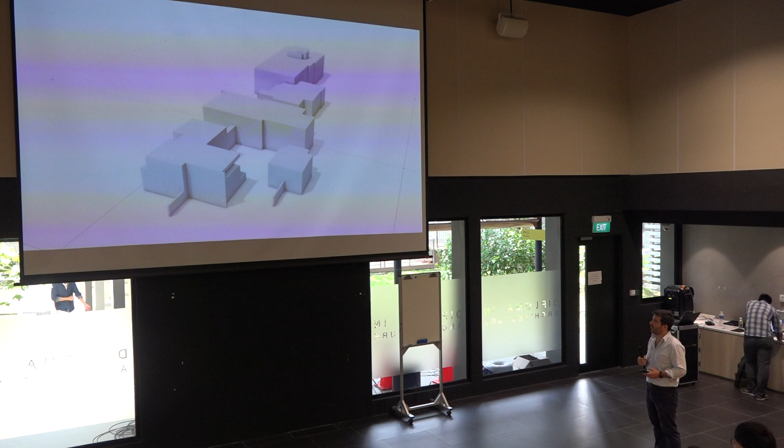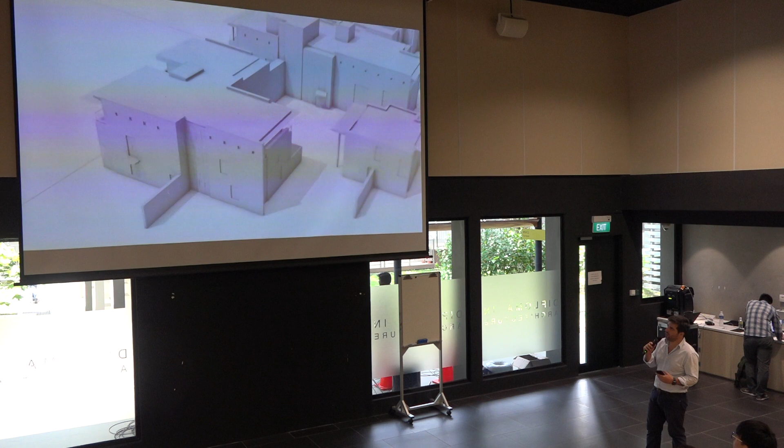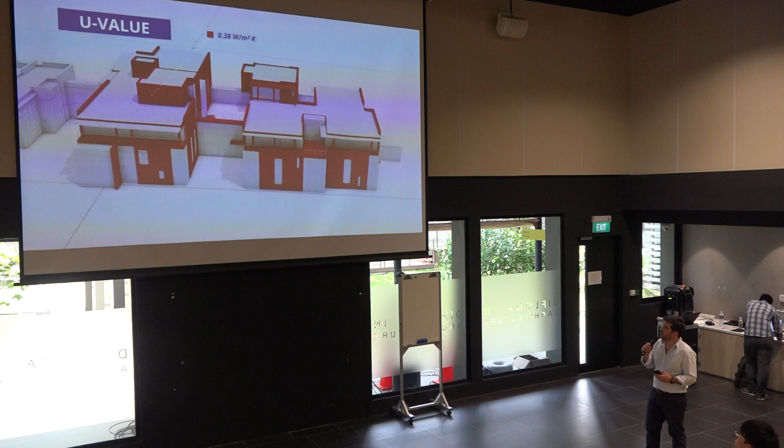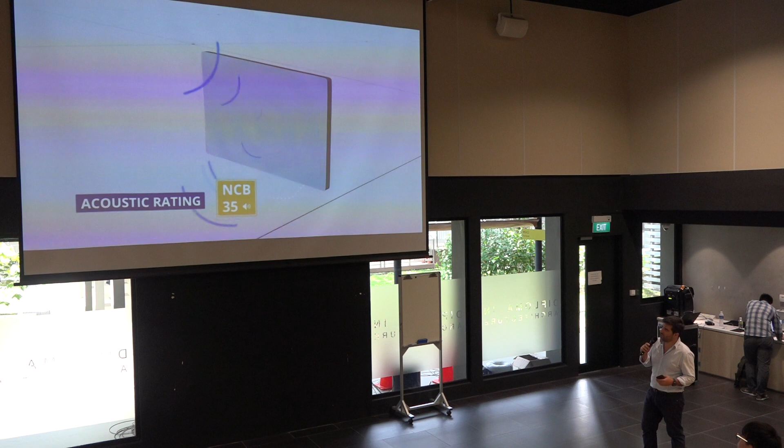We can start with the mass modeling, checking what are the areas that we have on each floor. We can document it with different colors. Then when we start checking the real building elements, we can check what are the properties for the windows, properties for the slabs. And also check, for example, the acoustic rating that elements have.

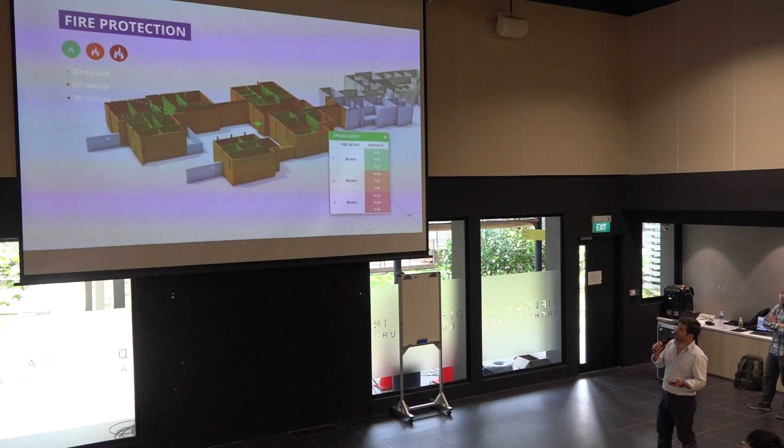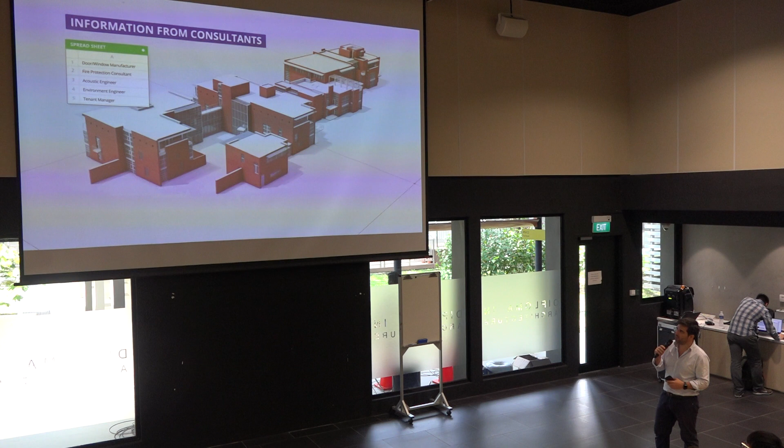We can use the connection. You see that we have a spreadsheet, and we can key in what are the values that we want to push back to the BIM model. I'll also showcase a few of these examples when we go for the training.

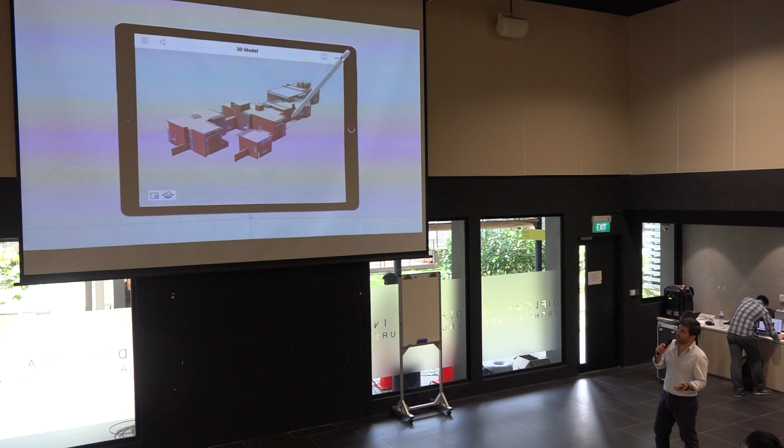And once we finish the project, we can bring it into a tablet or into a mobile device and use that as a presentation tool. Instead of bringing the computer, you can just present it on a mobile device.

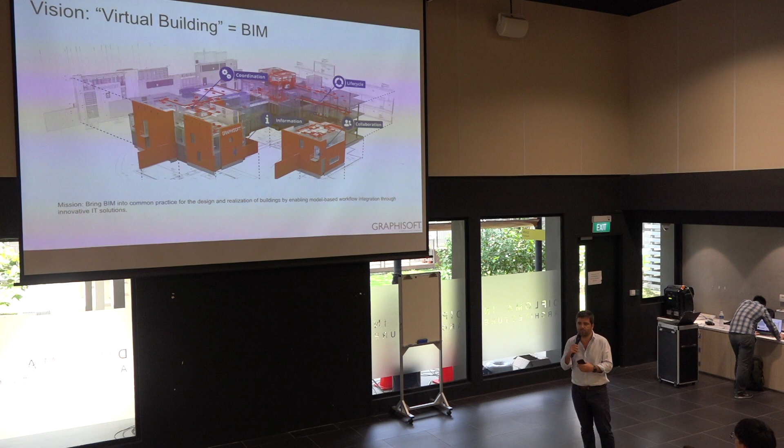So pretty much you see that the building is not just the geometry, what we see in it. There's a lot of information that we have to give to it. It's not just the textures or the color or the shape. We might have a lot of intentions that we want to transmit to the building as a property. So fire rating, acoustic rating, all this kind of information.

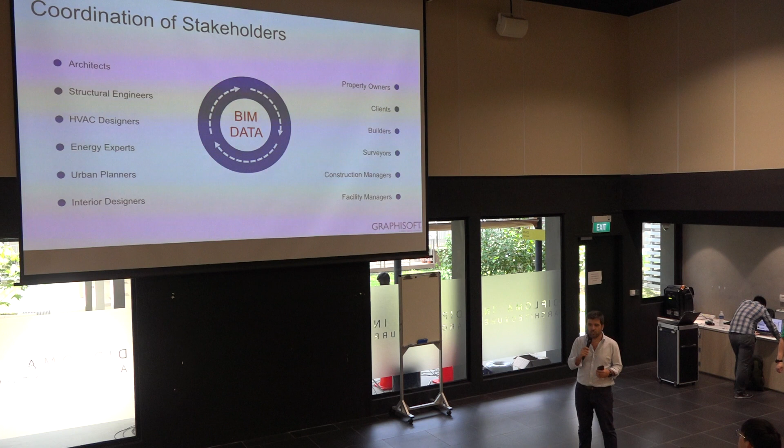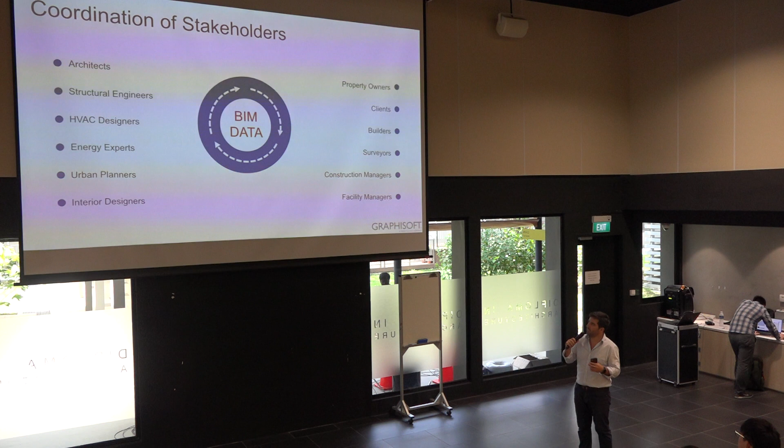So this is part of the IPD process, and what is the idea behind this? In the center of all this process, you will have one building, or your design, that will be the BIM data, and you can make it integrated with all the different stakeholders. And basically, it's not just the technology. The technology in this case is developed by Graphisoft or other software developers, but you also need to have the people willing to try all these things. That's why we have you here.

And the other thing is the process. So you will see that with different tools, people can come up with very different results. Not just in terms of design, you might want to go and showcase a very green building that will have a very sustainable approach to the design, or you might want to go and have a very funky building where the shape that comes out of it is going to be your key factor to win the competition. So it really depends on how you want to focus and what process you're going to take.

In this case, as our solution ecosystem, what Graphisoft has is Archicad as the authoring tool. This is where you can create the building, where you generate the geometry. Then we have the BIM data management tool, which is called the BIMcloud. This basically allows multiple users, so as a team like you guys are, to work together in one single model or in one single project at the same time. It's almost like Google Docs or Google Spreadsheets, where you can have multiple people editing.

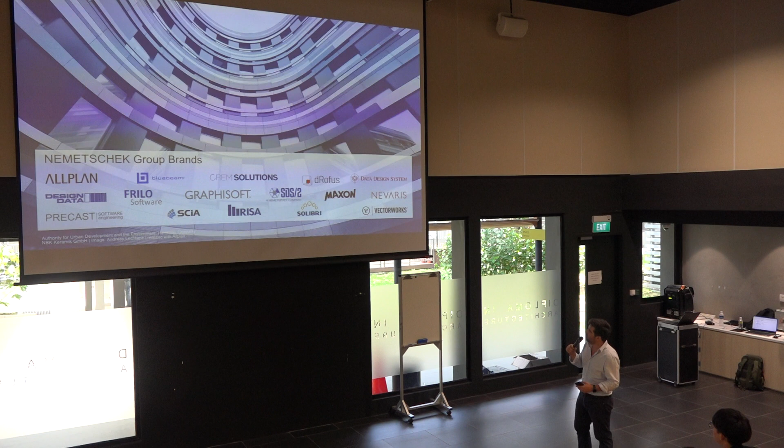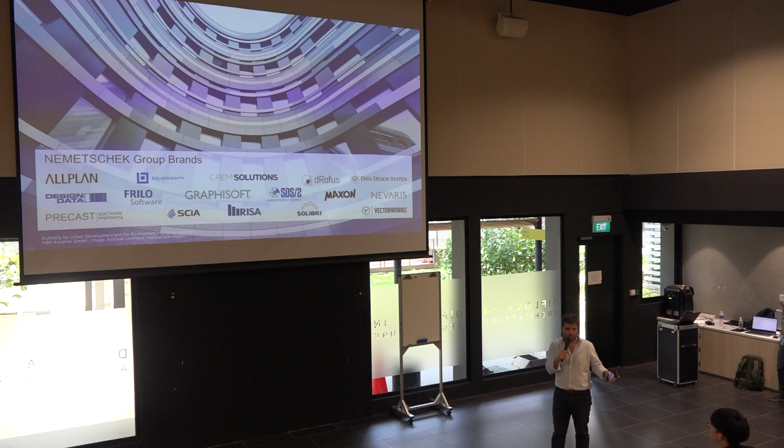So these are some brands from the Nemetschek Group. Obviously, the connection between these softwares and Archicad are more deeply integrated because they belong to the same group. So we always try to have a live connection. We have the Maxon rendering engine built into Archicad, a live Solibri connection, a live dRofus connection. So everything that you do in one software can be seen on both sides.

We're also based in almost every country in the world. We have 85 distributors, 11 subsidiaries. And the important thing for you guys is that in Singapore, we are direct here, so we get closer feedback from the market, and we work closer with the market as well.

So the main focus of using a BIM tool is, instead of you starting with just 2D drawings and then going through the different project stages and somewhere in the middle delivering a BIM model—this is pretty much what everybody was practicing as a BIM workflow in the beginning of their careers.

But the idea should be that you have BIM data as the backbone of your process. So even if you start with a mass model, you can start directly as BIM because you need to ask the model for information like what is the area, what is the volume, what is the orientation that I have from this facade or that facade, is this one exposed to sun or not. So all this information is pretty important even in the early stage of the design.

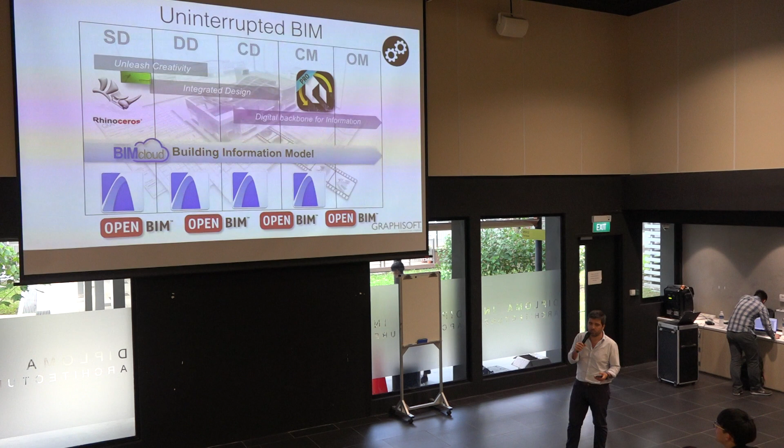So throughout different stages of design, you can see that Archicad is like the platform for this. BIM Cloud is the collaboration platform, so if you're working with more than one person, you should use BIM Cloud for it. And we have different solutions that go throughout the different project stages so you can focus more, and OpenBIM is always there to back you up if you want to do some work on site.

In terms of content, we have been working very extensively in Singapore to develop a lot of dedicated content to this region. Mostly you guys can connect to our Asia BIM blog, a blog that we created here where we answer some of the queries.

For example, you have the points for the terrain where you're going to do the design, and you want to bring it into Archicad. You only have the X, Y, Z coordinates. We have an article to show you how you can do that. So we try to focus and have approaches on what our clients, students, or people in the region are looking into.

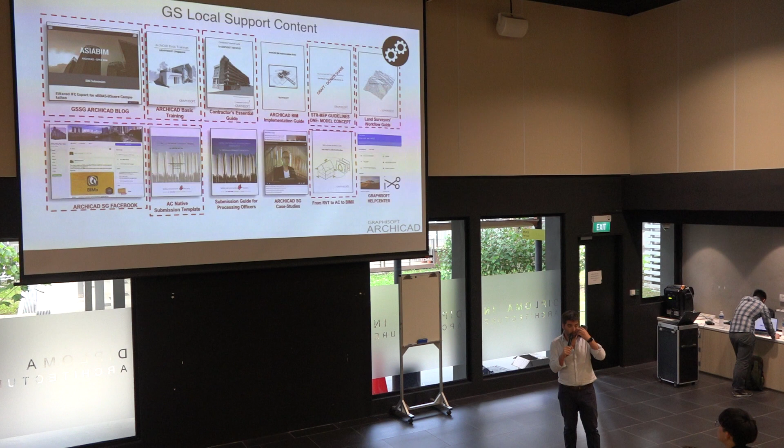Then we also have a Facebook page. We have other guides, mostly for practice. But for example, we have the one on the bottom right from Revit to Archicad to BIMx, where basically if you want to use BIMx as a presentation tool, even if you want to design with Revit, that's fine. You just export it through IFC, bring it to Archicad and then to BIMx.

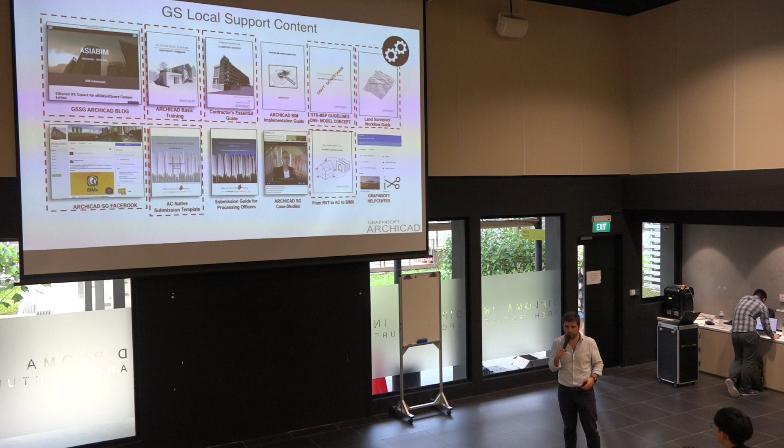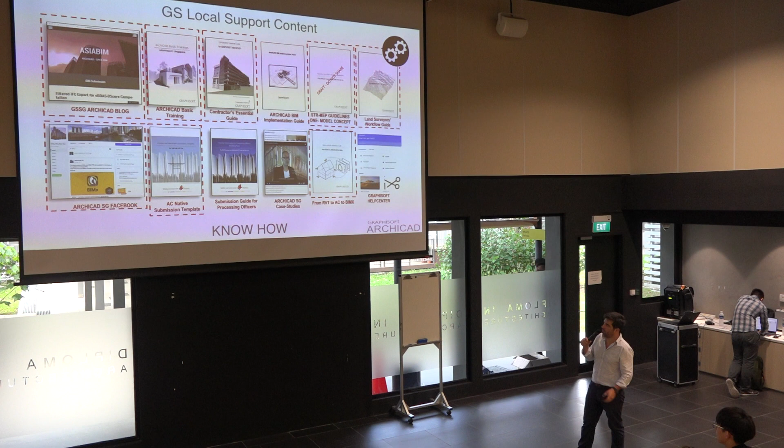I will share with you some of these materials when we go for the training, because I think they're very useful to you. So the focus for this is to give you know-how, so if you're stuck and don't know what to do, you can always go to the Graphisoft Help Center or our blog or go through these documents to find the solution.

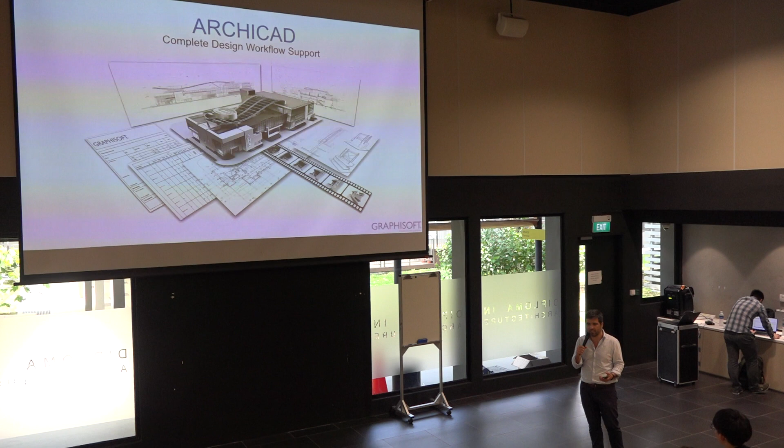Okay, so basically I already mentioned what Archicad is and does. Here is the description of it. Again, the idea is to have a building, so you create a model and then all the documentation, the drawings, the renderings, the information comes from the model. You don't create all this information first and then go model it—that's not the focus, it's exactly the other way around. So you can go through...